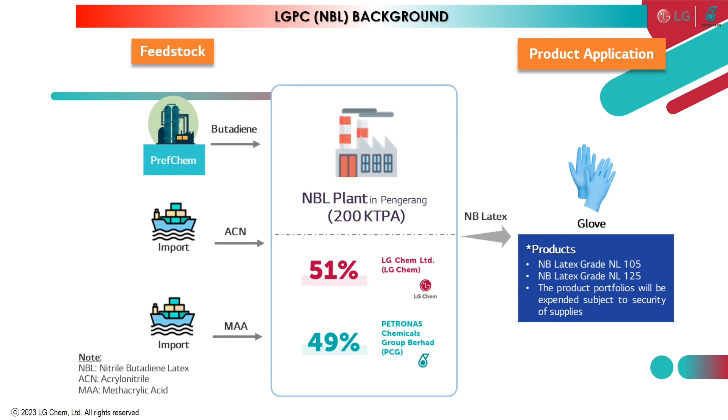Please listen carefully. LG Petronas Chemicals Malaysia (Lgpc) is a joint venture company from LG Chem and Petronas Chemicals Group Berhad (PCG). Nitrile butadiene latex (NBL) is a synthetic latex produced through the polymerization of acrylonitrile and butadiene. Final products produced are NB latex grade NL105 and NB latex grade NL125, used to produce gloves.

Lgpc Corporate Health, Safety and Environment (HSE) Policy. HSE is one of the Lgpc core values that influences our decisions, actions, and behaviors. Our commitment to HSE is evident in our health, safety, and environment policy. HSE is the fundamental element for securing differentiated competitiveness. We believe all incidents are preventable, and to ensure compliance with this policy, we will consider health, safety, and environment as the top priority in all our business activities.

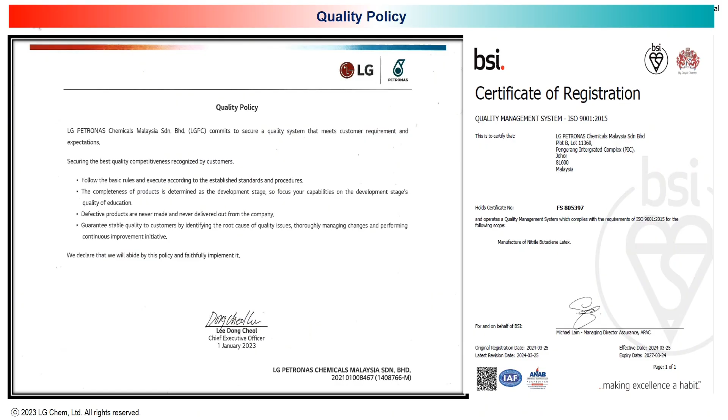Lgpc Quality Policy. At Lgpc, we also strive to ensure all our activities are in line with the quality policy. Lgpc commits to securing a quality system that meets customer requirements and expectations, to ensure all our products and services meet stringent quality and safety requirements.

Lgpc Substance Misuse Policy. Lgpc is committed to providing a substance misuse-free workplace, as substance misuse impairs employees' and contractors' performance, including subcontractors and visitors, and the safety of oneself and others, posing a threat to health, safety, and environment. Substance misuse includes any illegal drugs, alcoholic beverages containing ethanol, legal psychoactive drugs obtained or used without legal prescriptions, and legally prescribed psychoactive drugs consumed beyond their therapeutic or prescribed uses.

Hygiene requirement. Personal hygiene: must wear appropriate PPE when entering the operation area. Wear clean cloth, coverall, and safety shoes. Wash hands regularly, especially after use of the bathroom.

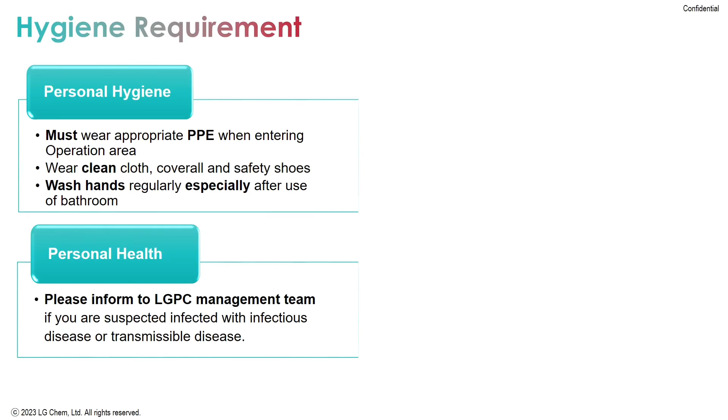Personal health: please inform the Lgpc management team if you are suspected of being infected with an infectious or transmissible disease. At Lgpc NBL plant, no food and drink is allowed except drinking water in operation areas. No smoking or vaping except at designated areas. No spitting except at appropriate areas. Do not litter.

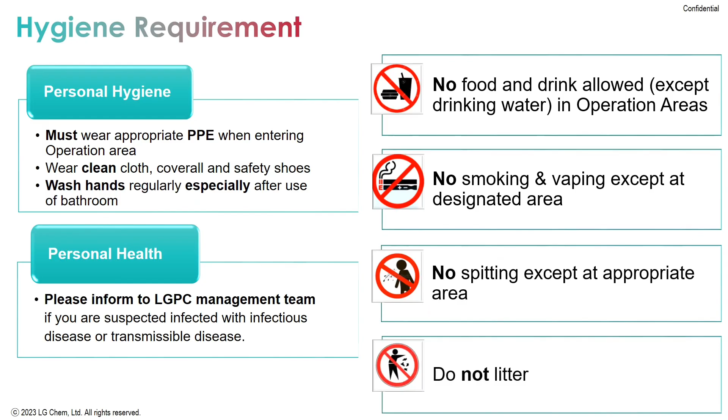Security, physical, information, and cybersecurity: Report to security if you see any unfamiliar faces or someone suspicious inside or outside the plant. Report to security if you see security anomalies such as broken fence, lights not functioning, doors not locked, etc. A gate pass must be used to bring out company assets.

Get signature from Lgpc managers. Hand over the gate pass to the security officer prior to exit. Do not leave valuable items such as hand phone, wallet, money, etc. unattended. Keep saleable items such as scrap metal, valves, copper, etc. in a secured area to avoid inviting intruders.

Practice clear screen policy. Always lock your screen before leaving your laptop or PC. No physical fighting is allowed inside the Lgpc area. All security incidents and security threats or hazards must be reported to the Lgpc management team and logged in the EHS 2.0 system.

EHS 7 Cardinal Rules. 1. Personal protective equipment (PPE): wear personal protective gear according to the working conditions. 2. Safe hot work practices: measure flammable gas concentrations and have a fire extinguisher available when working with open flame.

3. Hazardous atmosphere: measure hazardous gas and oxygen concentrations when accessing and working in a closed space. 4. Elevated work: when working at heights, implement fall prevention measures and wear a safety harness with double safety hooks.

5. Permit to work (PTW): work must only commence after the issuance of a work permit. All work should be carried out only after safety measures are completed and a work permit has been issued.

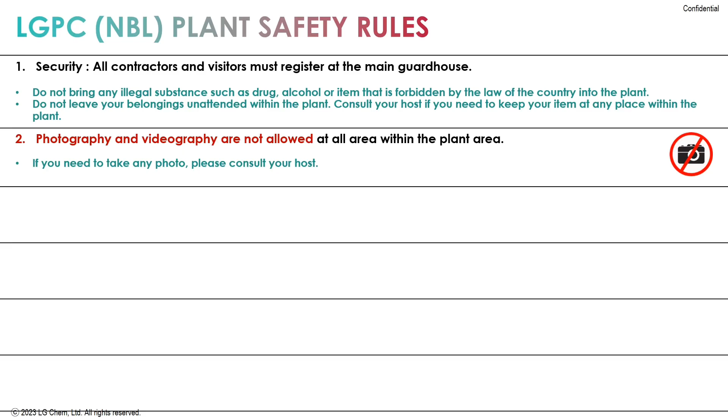2. Photography and videography are not allowed at any area within the plant. If you need to take any photo, please consult your host.

3. Do not use mobile communication devices while at the plant, except using a walkie-talkie. Only employees with permission from the plant director are allowed to use smartphones.

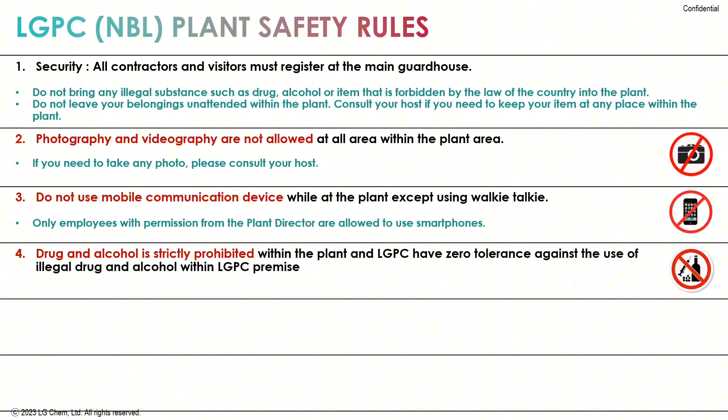4. Drug and alcohol use is strictly prohibited within the plant, and Lgpc has zero tolerance against the use of illegal drugs and alcohol within Lgpc premises. 5. Any person under the age of 18 years old is not allowed to enter the site.

6. No smoking and vaping. Smoking and vaping are only allowed at designated areas. Strict disciplinary action will be taken against non-compliance.

7. Speed limit for driving within the site is 25 km per hour. All vehicles entering and exiting the plant will be subjected to security checks. Follow road signage and stop lines available at the plant area.

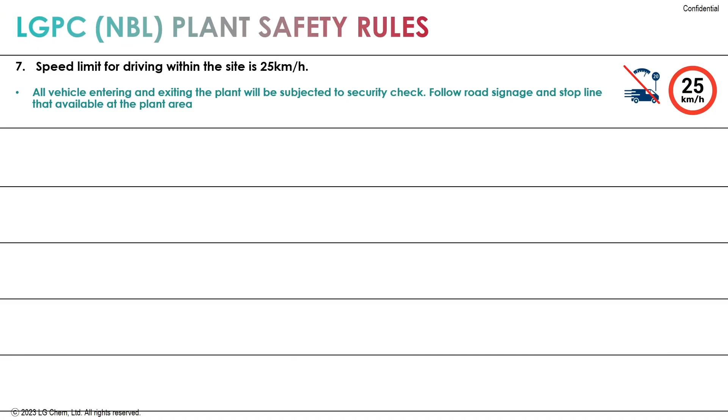8. Please reverse park your vehicle at the designated parking area. Do not park your vehicle at any other area. For trucks and lorries, please ensure to install a stopper before you leave the truck or lorry.

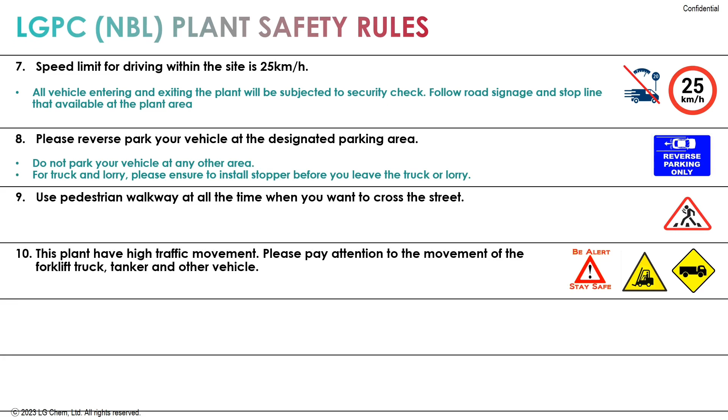9. Use the pedestrian walkway at all times when you want to cross the street. 10. This plant has high traffic movement; please pay attention to the movement of forklift trucks, tankers, and other vehicles. 11. For employees or contractors performing any work within the plant area, Lgpc's permit to work system needs to be followed.

Only employees and contractors who have been trained to LGPC PTW requirements are allowed to perform any work at the site. All equipment, power tools, and additional PPE such as safety harness must be inspected by the LGPC team and have a valid tag before using it.

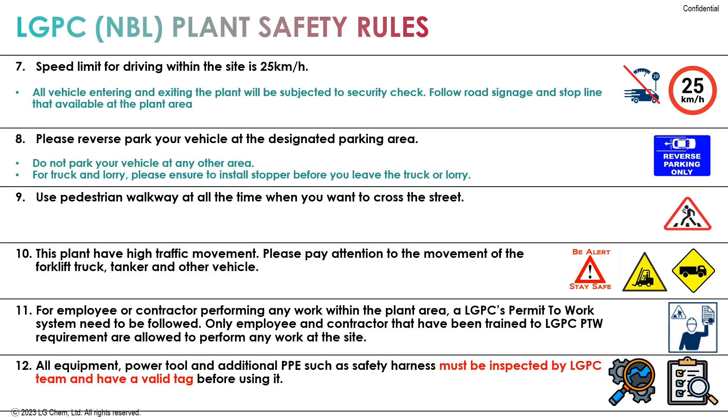Ensure good housekeeping at all times in your working area. Ensure there is no spillage of any chemical, oil, or paint. In case of spillage, the spill needs to be contained immediately. Always segregate domestic waste and scheduled waste accordingly. All chemicals, oil and paint, or its container must be disposed of as scheduled waste.

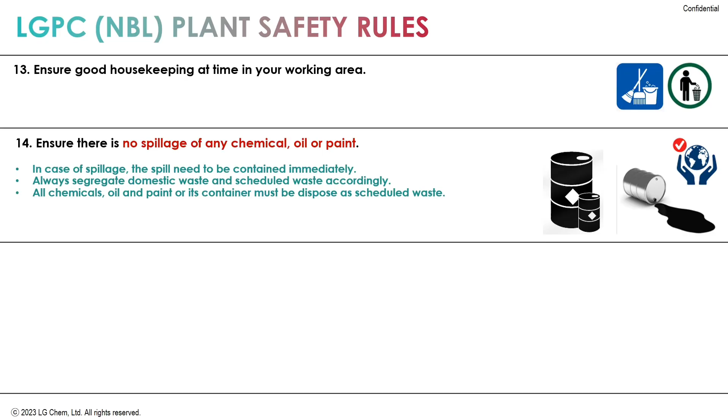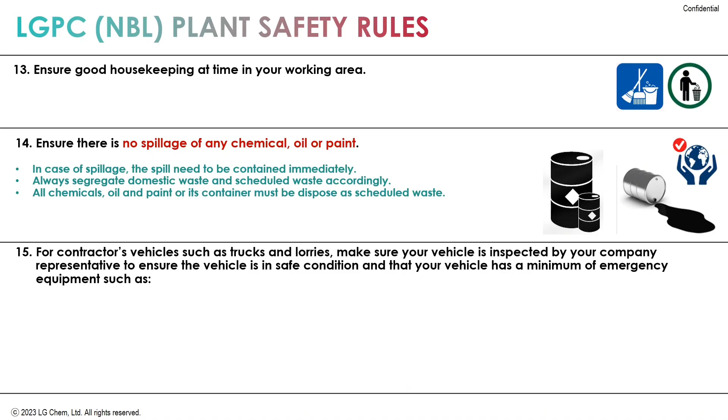For contractor vehicles such as trucks and lorries, make sure your vehicle is inspected by your company representative to ensure the vehicle is in safe condition and that your vehicle has a minimum of emergency equipment such as fire extinguisher, first aid box, ERP module, and emergency reflective triangle kit.

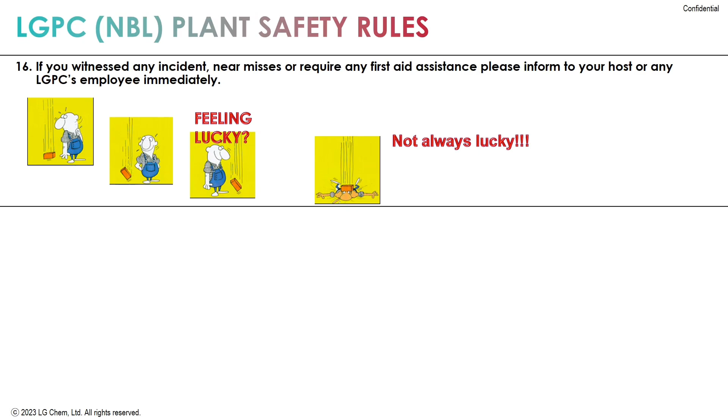If you witness any incident, near misses, or require any first aid assistance, please inform your host or any LGPC employee immediately. This is the LGPC plant layout.

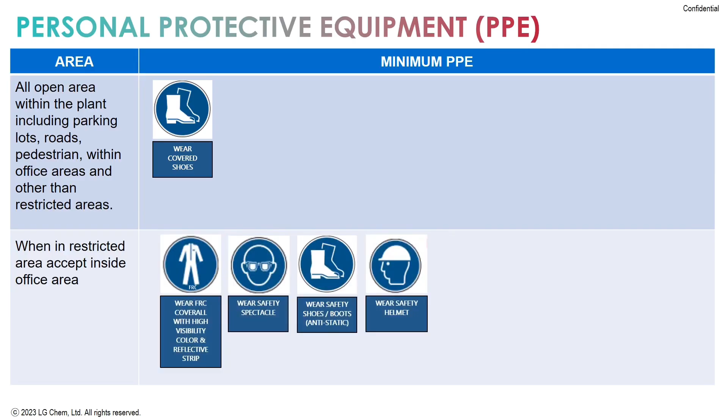Personal protective equipment (PPE): use personal protective equipment at all times while at the plant. Specific PPE for restricted areas must be observed. Minimum PPE for all open areas within the plant, including parking lots, roads, pedestrian areas, office areas, and other than restricted areas. Minimum PPE when in restricted areas except inside office areas. Minimum PPE for specific areas such as loading area, cooling tower, turbo chiller, and boiler.

Hazardous substances on site as per JKKP 5. There are 3 hazardous substances on the site that fall under CIMAH requirements and exceed the threshold quantity, namely 1,3-butadiene, acrylonitrile, and potassium persulfate. The potential sources of major accidents.

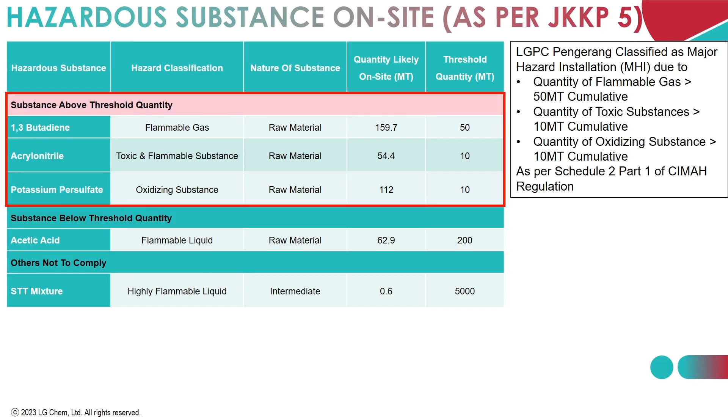The potential sources of major accidents are loss of containment of 1,3-butadiene from piping, loss of containment of acrylonitrile storage tank and piping, uncontrolled runaway reaction in reactor, and loss of containment of oxidizing material. Classification of hazardous substances.

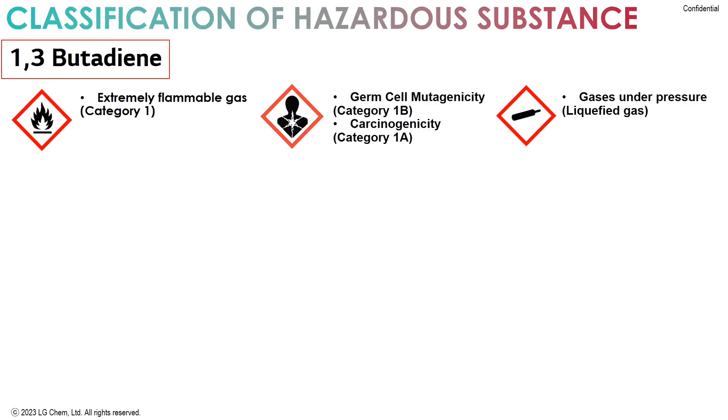These are the hazard classifications of the 3 hazardous substances that fall under CIMAH requirements and exceed the threshold quantities: 1,3-butadiene, acrylonitrile, and potassium persulfate.

Please ensure to follow the specific JHA and/or PTW or work order given by the LGPC team during work conducted near or inside the hazardous substances.

The following are LGPC-related risks from the CIMAH report, QRA, and HIRARC that have the potential to occur at LGPC plants: jet, pool, and fireball fires, explosions, and toxic spills that can occur due to loss of containment of 1,3-butadiene and acrylonitrile from pipeline and storage tanks, uncontrolled runaway reactions in reactors, and loss of containment of oxidizing agent. And other hazards such as...

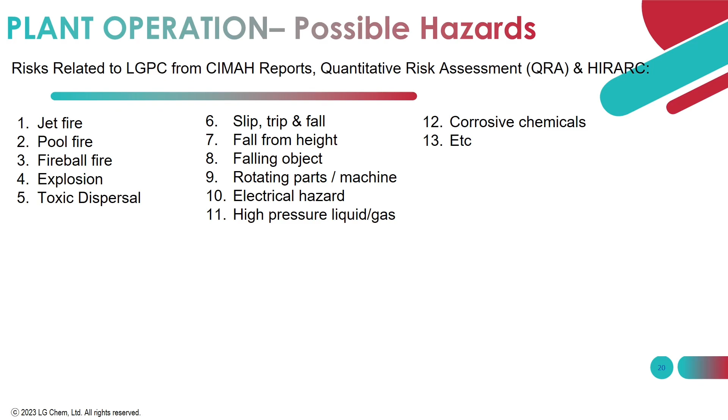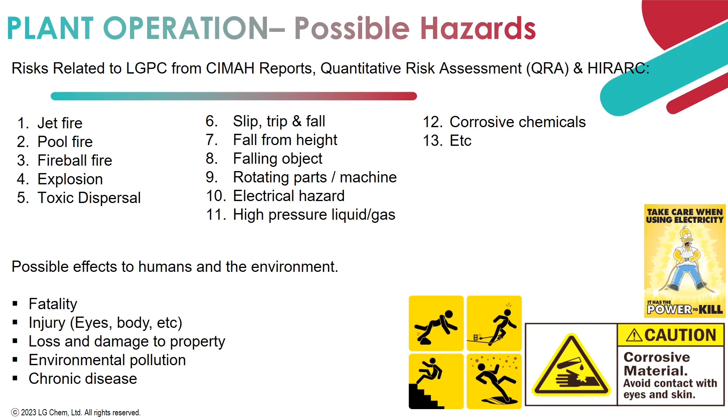Because of this, job hazard analysis and/or job method statement is mandatory for all tasks performed by the contractor. It is important for LGPC employees and contractors to perform any task as per agreed job hazard analysis and/or job method statement to ensure identified hazards can be prevented or reduced based on agreed corrective and preventive action, and to avoid the effects of the hazard to humans and the environment from occurring.

In case of emergency, a continuous alarm will be sounded. There are 5 types of public address general alarm (PAGA) siren as below.

1. Flammable gas alarm (penggera gas mudah terbakar). 2. Toxic gas alarm (penggera gas toksik). 3. Fire alarm (penggera kebakaran).

4. Evacuation alarm (penggera meninggalkan loji). 5. All clear alarm.

If the flammable gas alarm, toxic gas alarm, and fire alarm sound without the evacuation alarm, just stand by at your working area and listen to announcements from the control room.

If the flammable gas alarm, toxic gas alarm, and fire alarm sound together with the evacuation alarm, and there is an announcement from the control room: do not panic. Stop all your work, secure the work area if required, and proceed to the emergency assembly area. Walk briskly but do not run.

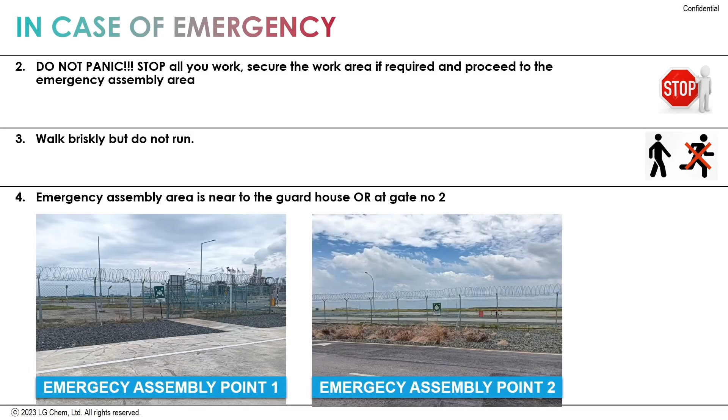The emergency assembly area is near the guardhouse or at gate No. 2. If you are inside an occupied building, please find the exit light or exit door, then find the nearest walkway path and go directly to the assembly point.

Please refer to the wind sock to identify the wind direction and to identify the safer route to the emergency assembly area. If you are inside the plant area, please find the nearest walkway path and continue to the assembly area.

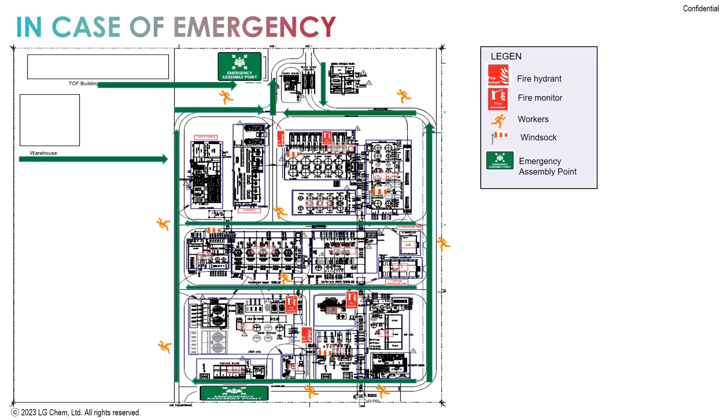As per requirement under Section 15(1) OSHA Amendment 2022, as far as practicable, the employer has the responsibility to ensure the safety, health and welfare of all its employees while working.

As per Section 24 OSHA Amendment 2022, employees including contractors also have to carry out their responsibilities by working together with employers and people around them, to take reasonable care for the safety and health of themselves and of other persons who may be affected.

Comply with OSHA Act 1994, guidelines, safety procedures, JHA and company requirements, and wear and maintain PPE given by the employer. The penalty for non-compliance to OSHA 1994 is a maximum penalty of RM 2,000 or 3 months jail or both.

Remember, safety practices are not to be implemented part-time, sometime, no time, but safety practices must be implemented full-time, on time, and every time, because good luck does not happen all the time.